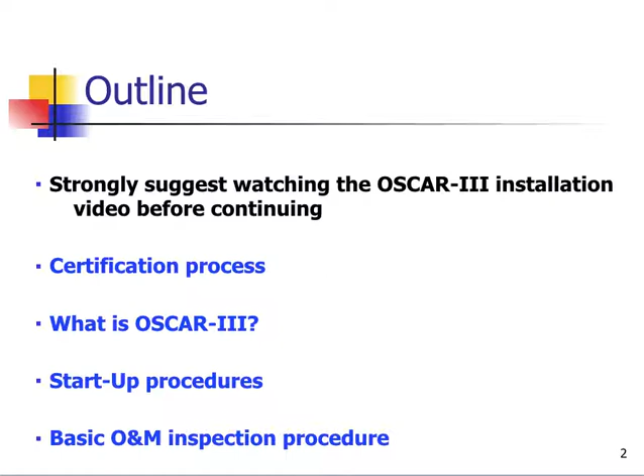The rest of our presentation will be the certification process to become certified as a maintenance provider. We'll also discuss what the Oscar III actually is, go through some of the startup procedures and quality control checks, and then we'll cover the basic operation and maintenance inspection procedures.

Our certification process has 4 basic steps. I'd like to go through those in a little more detail. The first one is once you've completed this video, we suggest that you give us a call. We'll have a brief phone conference, answer any questions you may have, emphasize maybe a few items, and then we'll place your name on our certified list of professionals.

That can be found on our website by clicking on the Certified Professionals link. And what that list entails, it'll just be a list of individuals alphabetically by last name. We also include the county that your business is located in.

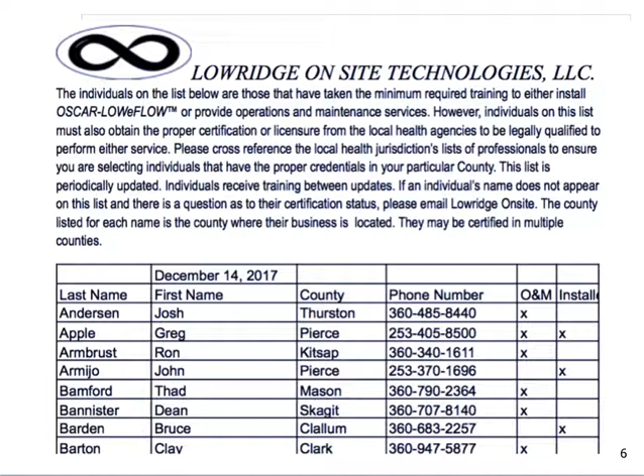This is not a limitation on where you can perform your services. It's just to give an idea of geographically where you're located. Whatever phone number that you'd like to have us post, and then check whether you're a maintenance provider or installer, and in some cases both.

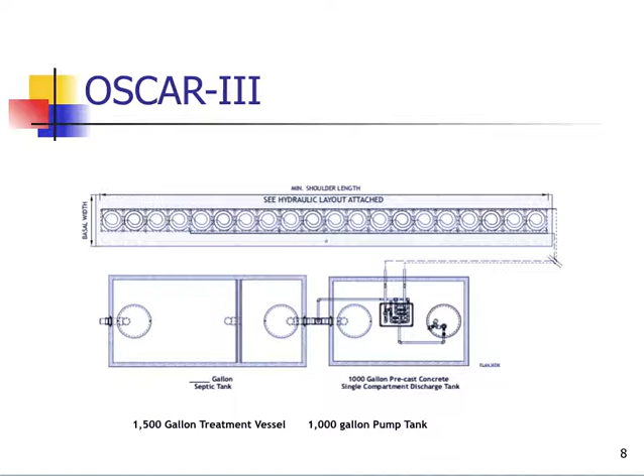So what is the Oscar system? Well, it's a simple wastewater treatment device. It's a 1,500 gallon septic tank with a 1,000 gallon pump chamber. We pump effluent through a headworks, a series of valves and filters. And then we have what we call the Oscar disposal component for the final treatment and disposal.

The Oscar is an acronym that describes what the system is. It's an on-site sand coil area recharge. As you can see here, it's just some simple coils in a simple format connected to some supply and flush manifolds over a bed of sand, and then of course we'll cover this unit with another 6 inches of sand as well.

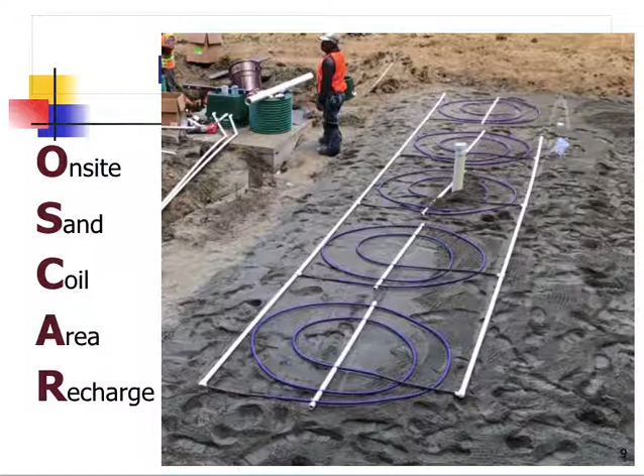The technology is proprietary. It is a treatment unit, again, and also a final disposal component. We do have, again, the coils and the sand as the basic 2 components of the Oscar drain field. We do have coils in 2 different arrangements, 25 gallons a day as well as 50 gallons a day with respect to the Oscar III.

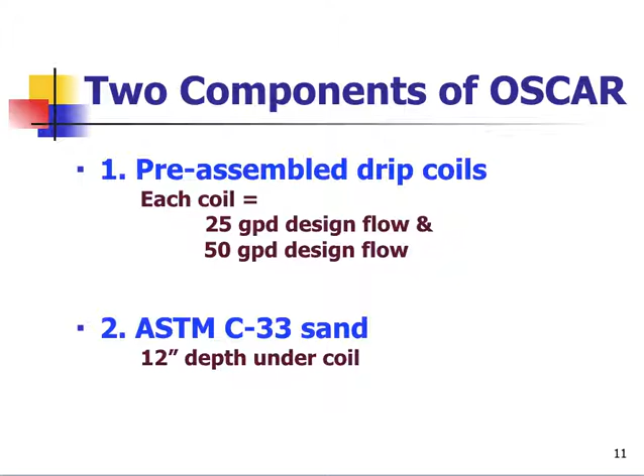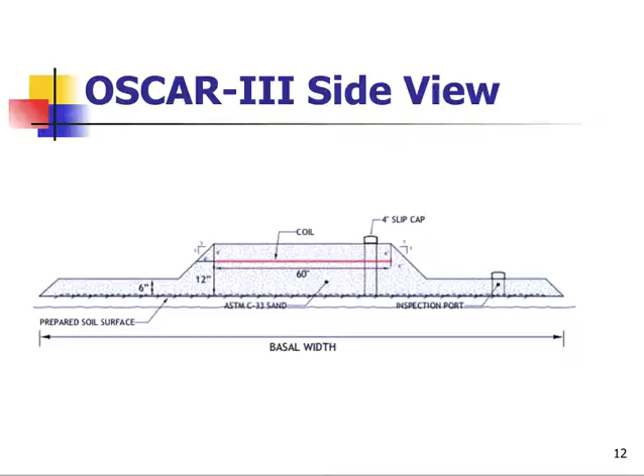Our discharge tank is a simple 1,000 gallon pump chamber. We have 2 floats, a timer enable float as well as a high level on float. We do want the bottom float to cover the pump, but as well as a minimum of a 4-inch separation between the bottom and the top float. You may see a greater separation between the 2 floats with the Oscar III, just depending upon what the local regulators may want to see as far as surge capacity.

Now that we're through with what an Oscar is, I want to go through some of the startup procedures and get into the nitty-gritty of the headworks and how things are arranged. The startup procedures help us determine the wiring for the floats, pumps, and valves to make sure they're done correctly, not so much by reading wiring diagrams, but more through functional tests. Once we're through with the startup procedures, we'll also know what the correct flows and pressures are.

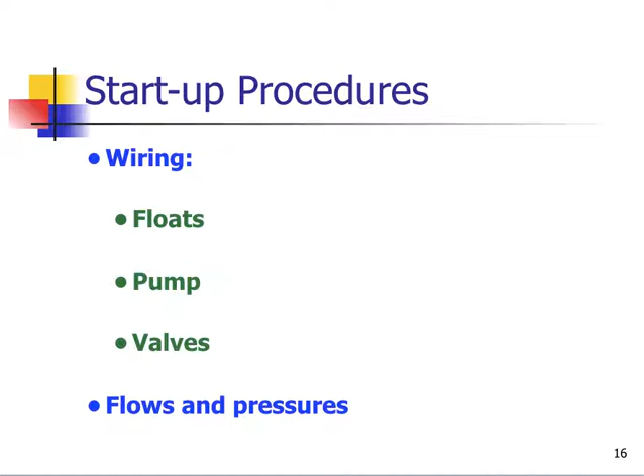The startup procedures, with respect to operation and maintenance, help us diagnose problems with the system. Many times I'll get a call with people having questions about what's happening. If they would have just gone through the startup procedures, they would have determined where and about what the problem is. It's a great place to start in determining where issues may be.

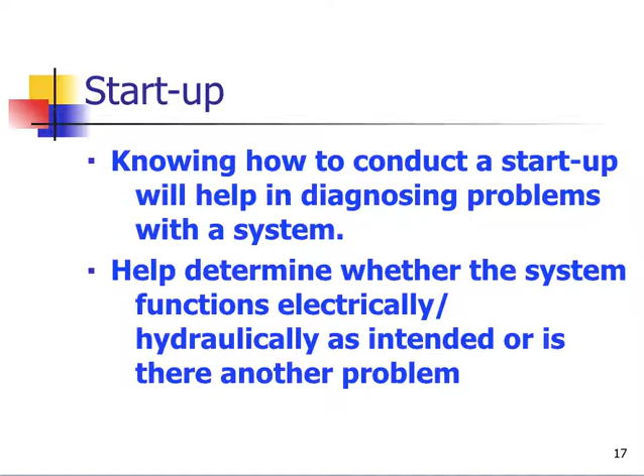Now the float wiring. We want to determine if the floats are wired correctly in the panel itself, that we've got the right wires in the right bus terminal positions. But we also want to make sure the float positions within the tanks are correct, either at the right height or in the right order.

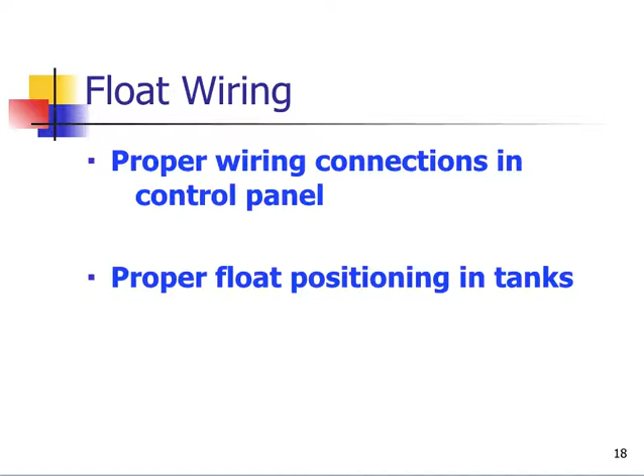In our control panel used for the Oscar II, the incoming wires for all the external wiring attach to the bus terminal, which is divided into 3 sections by these 2 yellow tabs. Everything to the left of the tabs is for the floats, between the 2 tabs is for valves, and everything to the right of the tabs is for pumps and incoming power.

So the way to check the floats, once all the wiring is done and we've turned the system on, we just want to lift up the top float and in about 5 seconds get a high level alarm. If you raise the bottom float, you'd have to wait maybe a few minutes for the pump to come on. An easier way to check the floats quickly is to use the input screen on the controller.

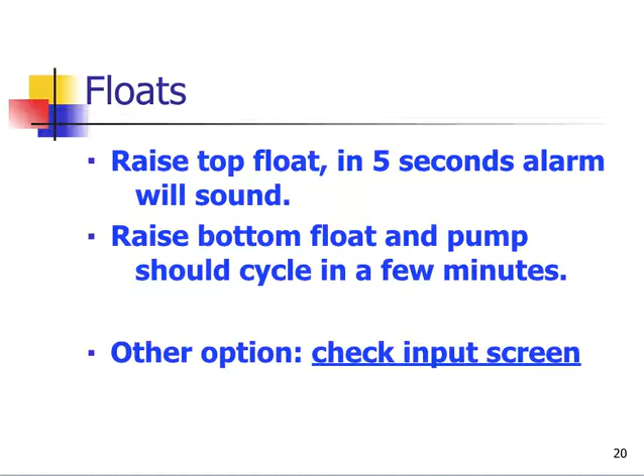The wiring diagram gives us a couple of pieces of information. Here we see bus terminal positions 1 through 4, where our bottom float is in positions 1 and 2, and the top float is in positions 3 and 4. You'll also notice at the very bottom, below the floats, input number 1 and input number 2, designating the input indicators on the screen, which we'll look at next.

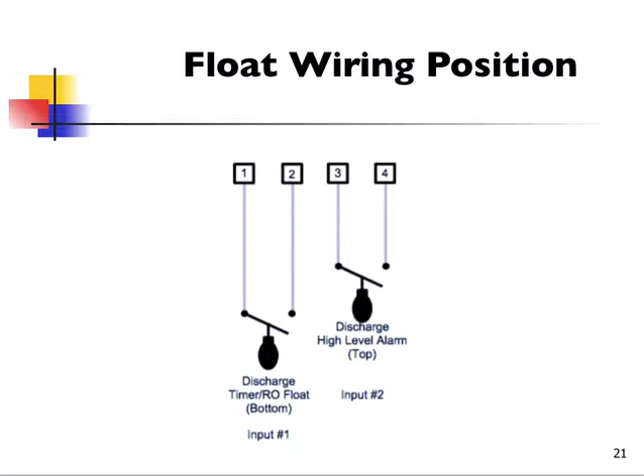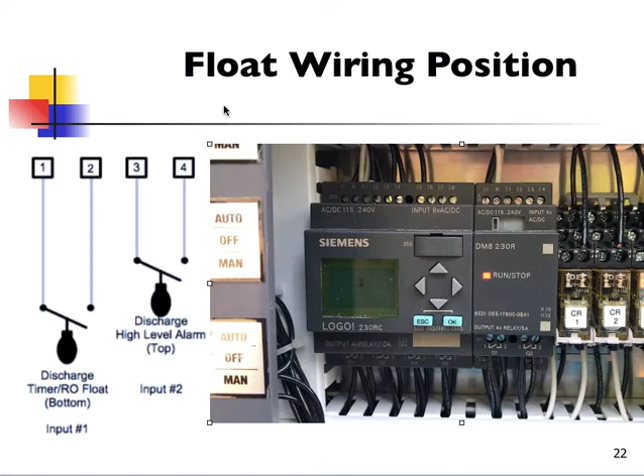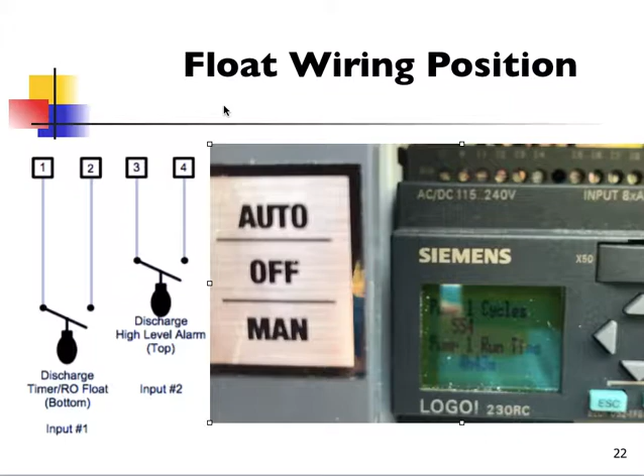So here we've got a controller, and when we turn the power on, the first thing we'll notice is the little indicator light illuminate. Once it goes green, we know we've got adequate power and the system is ready to function. As soon as the light goes green, we get our pump cycles and pump run times. Then we can use the down arrow and scroll down 2 or 3 or 4 screens to the date and time stamp. From here we can use the left arrow and go over to our input screen, and we know we're there when we see a large capital I in the upper left corner.

There we go. So what we can see with this is in this top line, which is really the only line we're looking at, the number 1 is backlit, indicating that our bottom float in the discharge tank is up, so we know we have at least enough water in there to start the on-off cycles. The number 2 indicator would be the high-level discharge float, which is number 2. Number 3 is usually a low pressure alarm if we were using an ATU with an Oscar system. This particular indicator would be that. So this gives you an idea of how valuable it is to take a look at the inputs.

Now if we wanted to test the top float, if we lifted the top float in this situation, the number 2 input would have a dark background, or be backlit.

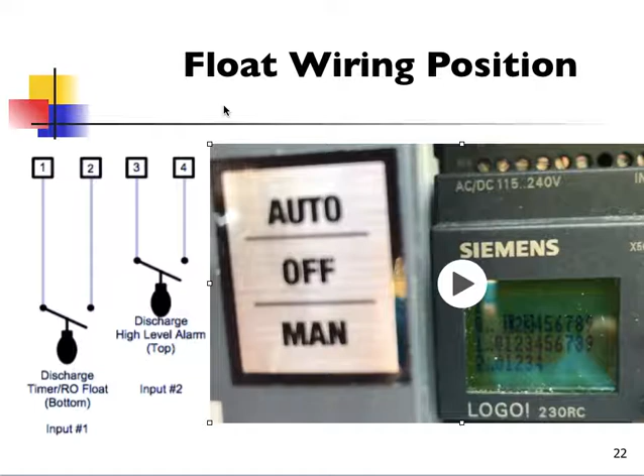Again, regarding the position of the floats in the tank, we need to have the pump flooded at all times, with a minimum of 4 inches between the 2 floats. In our float tree, we really do want it to come all the way down to the bottom of the tank, and then it's just held up by our float bracket in the riser itself.

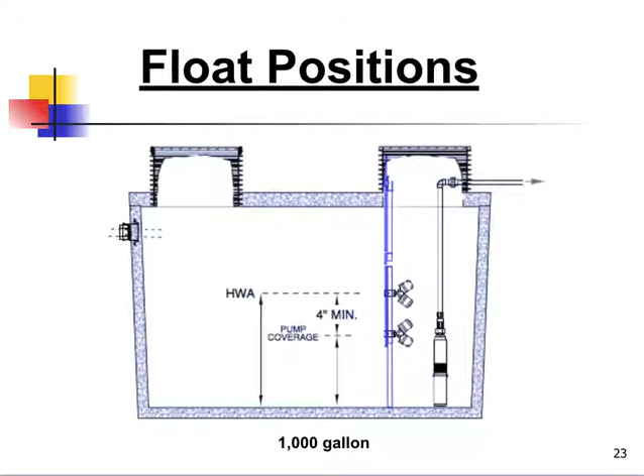The headworks, some of the specifications: we have a 3/4 inch disc filter, which is 120 mesh or 130 micron size in filtering capability. We also have 5 normally closed solenoid valves, and 3 pressure gauges.

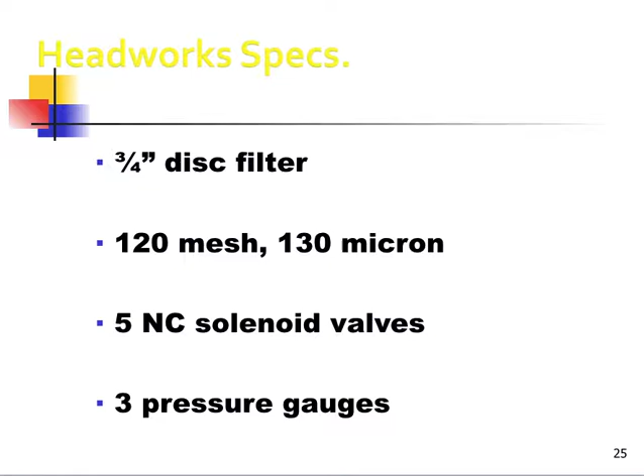Now the solenoid valves are actually made for the sewage application, not irrigation valves put in the wrong place. All these valves are normally closed, which means we need 2 things in order for water to flow through them: 24 volts to the solenoid, as well as somewhere between 8 to 15 psi at the valves to get them to open up. If we have hydraulic pressure at the valve but no electricity, the valve will not open.

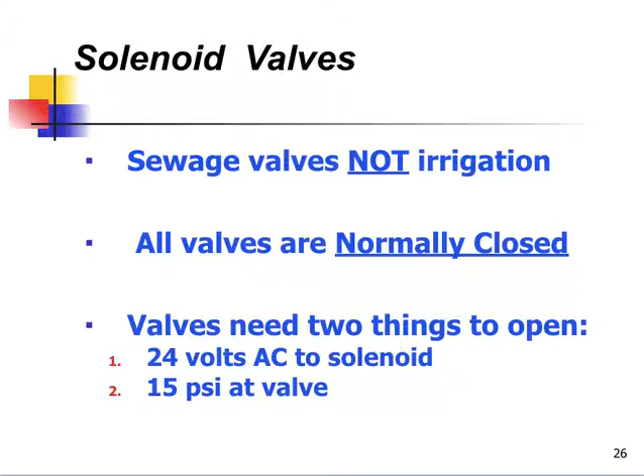Now the control panel will go through what I call 3 valve functions: V1, V2, V3. V1 is our dose, where we're just dosing the Oscar system. Our on-off times equate to about an 8-minute cycle between each dose. Valve 2 function is our disc filter backflush, very short, about 15 seconds. Our V3 function is where we're flushing the coils, and that lasts about 2 minutes. Once we're through with the coil flush, we go back to the on-off cycles, dosing the Oscar, and these 3 valve functions repeat themselves in perpetuity.

And of course, if there's no water in the tank and the low-level float goes down, then it just rests and waits for the next sequence to take place.

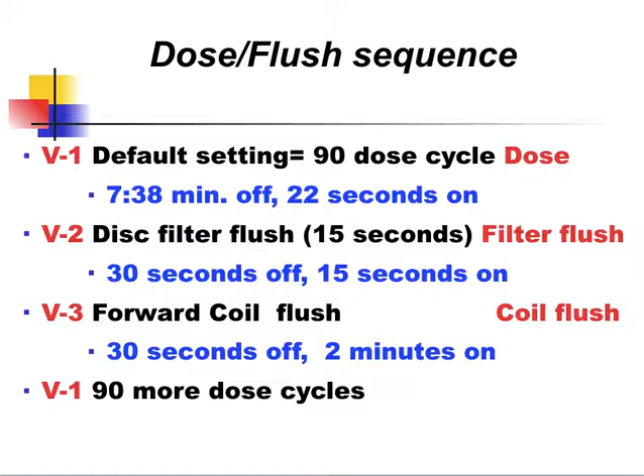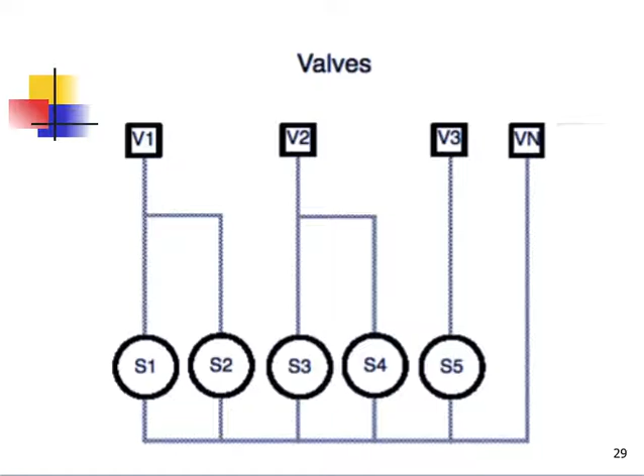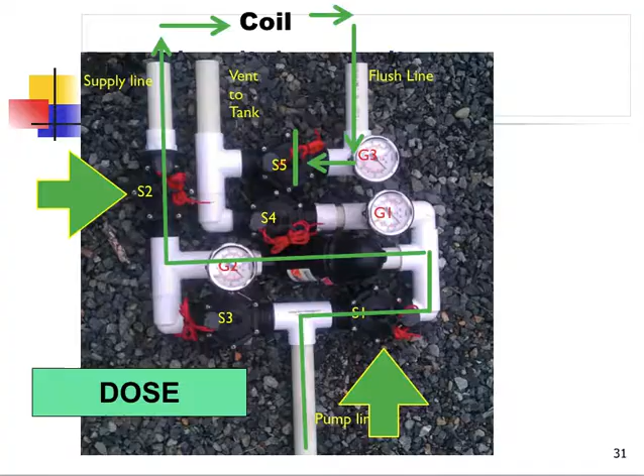Knowing that we need both electricity and flow to the valves, we need to turn the pump on and turn valves 1 and 2 on, and this will simulate what the controller would do. In our headworks, the flow path will follow this green line. Solenoids 1 and 2 will open up, allowing water to be filtered through the disc filter out into the coils. Valves 3, 4, and 5, because they have no electricity, will remain shut. So the flow path will look like this.

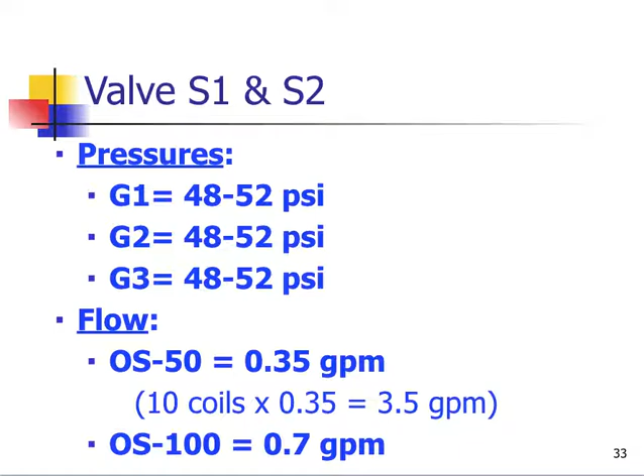Our pressures on gauges 1 and 2 are going to be right about 48 to 52. Gauge 3 about the same, maybe a little lower because we're losing some pressure and flow through the tubing and so forth. The flow, depending upon the number of coils, for instance if we had 10 of the OS50 coils, we'd have a flow rate of about 3.5 gallons a minute. The OS100 coils, which are twice the size, have a flow rate of 0.7 gallons a minute. So depending on the number of those coils, just multiply by 0.7 and you should have a reference point to check with your flow meters.

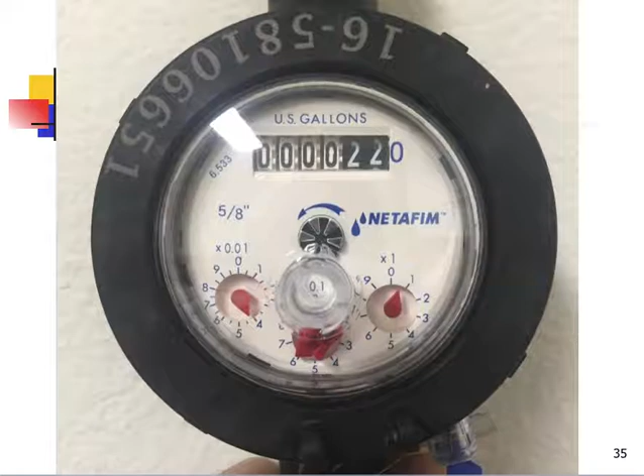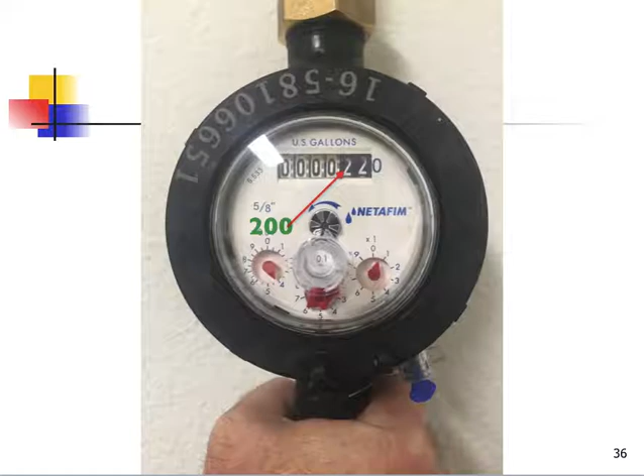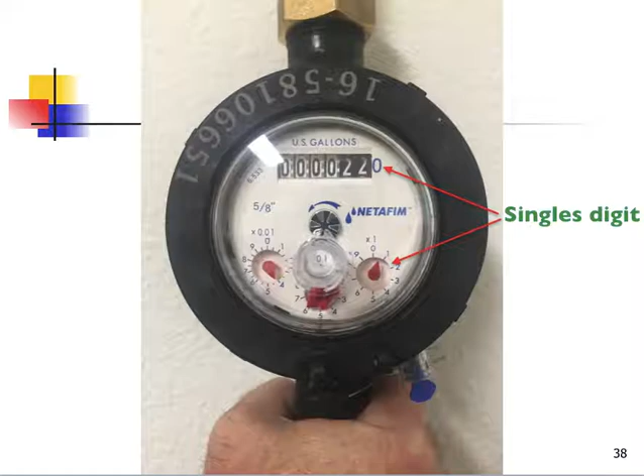Measuring the flow, we use a Netafim flow meter. Most people read this incorrectly. The first digit with the black background is the 100 spot. So if we're reading this dial, we'd say we have a reading of 220, and then to get the single digits we'd look at the first dial on the right. Being less than 1, it would have a 0 in the ones position. So reading it further, we'd have 220.6.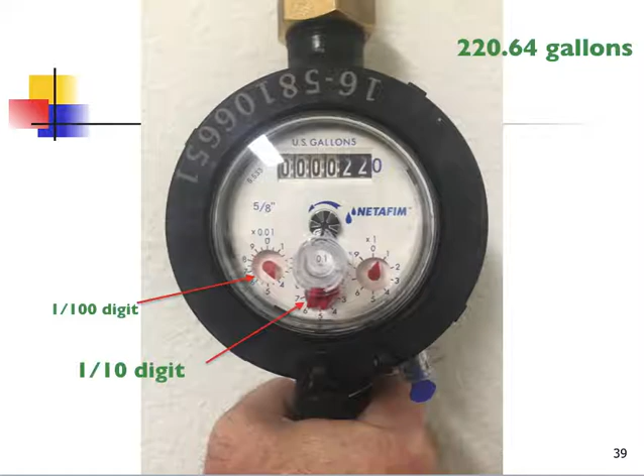The red dial in the middle is tenths of a gallon, you can see it's at 6, or 0.6 gallons. And the dial on the far left is 1/100ths of a gallon. So here we have 220.64 gallons on this dial for a reading.

The easiest way to measure flow is if we turn the pump on with the toggle switch and turn valves 1 and 2 on, let the system pressurize so we've got all the air out, and once we have a consistent flow during complete pressurization, all we need to do is count the rotations on the middle dial for 1 minute, and that'll give us our gallons per minute flow. That's the important number to record.

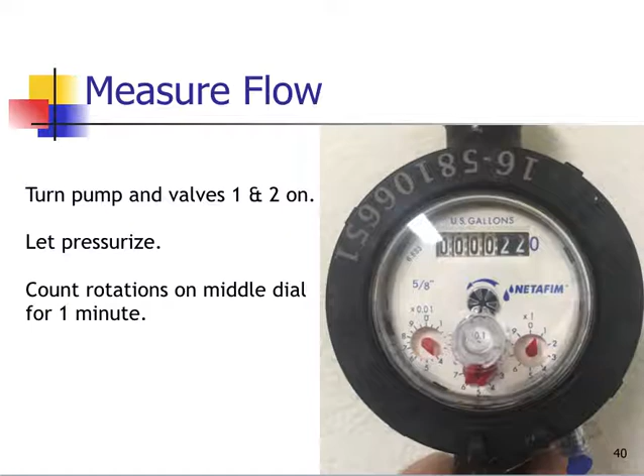Again, the flow rate: if we're using the OS50 coils, each coil is worth 0.35 gallons a minute. The OS100 is 0.7 gallons a minute.

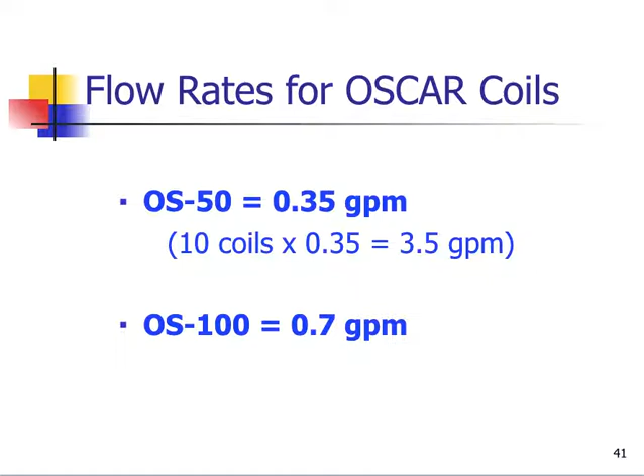The next thing we want to check or simulate is the back flushing of the disc filter. You'll notice that the flow path we're following here, the forward flow path, is the water comes into the housing of the disc filter, goes from the outside of the disc cartridge to the inside, and then exits the filter housing from the center of the discs themselves.

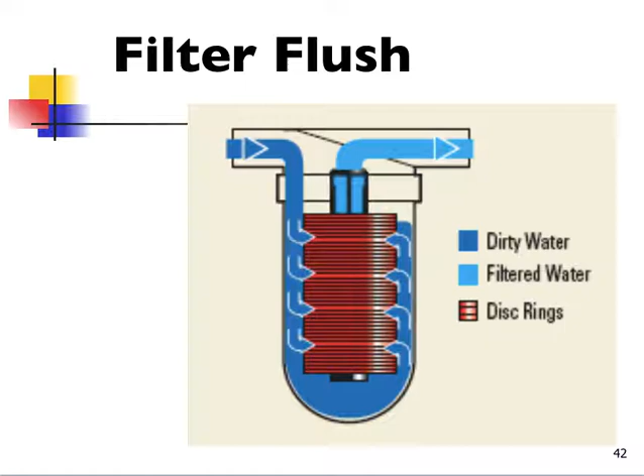What we're going to do is simulate the reverse flow. We're going to pressurize and have the water flow to the center of the discs, forcing it out, which will then clean the internal portions of the disc filter.

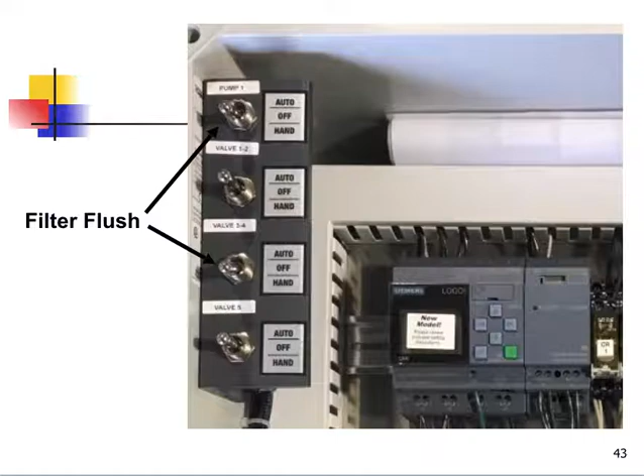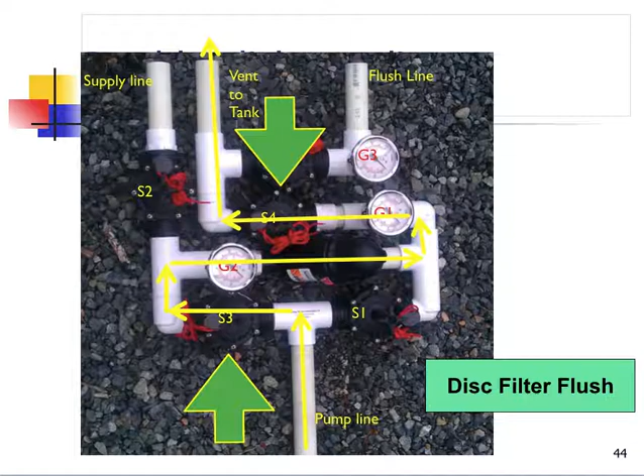So to do that, we'll need to energize valves 3 and 4, put them in hand or manual, and then pump 1 we'll have to put into the hand or manual position. So now valves 3 and 4 will open, the water path will flow backwards through the disc filter, and then we'll vent it back into the beginning of the septic tank. And the flow path will look just like this.

To indicate proper functioning, the pressures we should see here is gauge 2 should be about twice the pressure of gauge 1, usually around 20 and 10. Sometimes it'll be 18 and 12, or 18 and 8, something like that. We shouldn't see any pressure whatsoever on gauge 3. The flow we're really not concerned about.

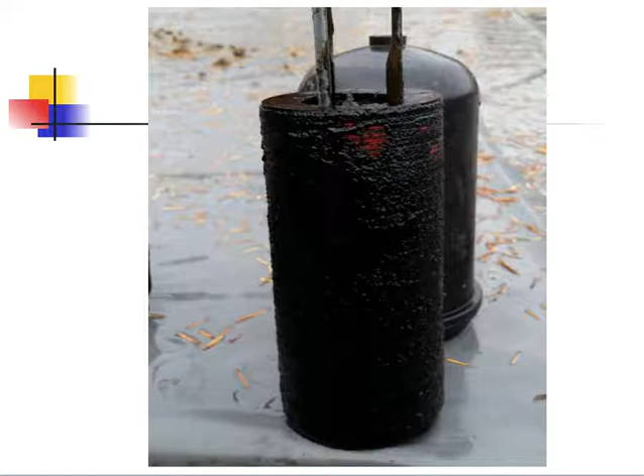Now what will happen in the disc filter, this is a filter that's been in operation for about 8 months. It looks like it's very dirty. We probably would think that it's clogged, but this filter was on a test that was run for 8 months. The flow and pressure readings were taken 3 to 5 times a week for the 8 months, and there were no changes in the pressures or flows.

You can see the red color of the discs. That's where a lot of the water is coming through to clean out the interior of the discs. But this is enough to keep the system functioning at adequate pressures and flows.

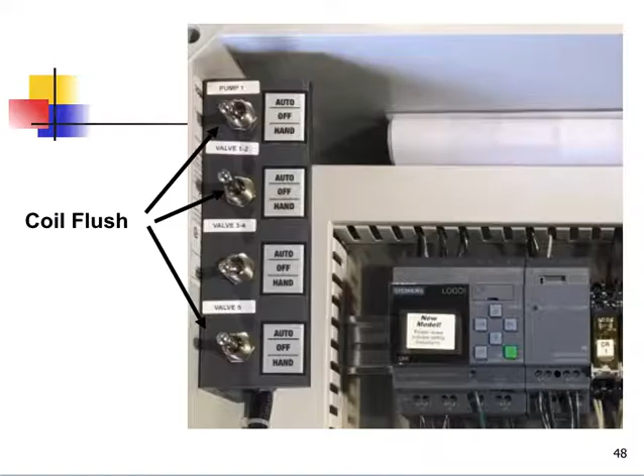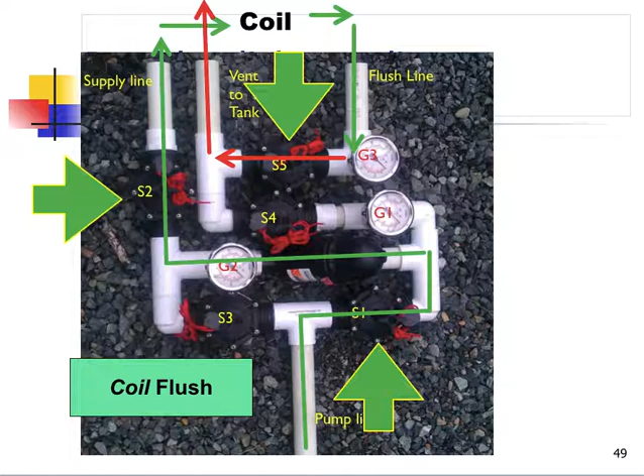Once the disc filter has been back flushed, we'll want to forward flush the coils. Again, we need to turn the pump on. This time we want valves 1 and 2 in conjunction with valve 5 energized. So 1, 2, and 5 will turn on. We'll have a forward flow through the coil, through the filter, forward flow through the coils as well, and then the flush water will then enter from the vent line into the tank. And so our flow path will look like so.

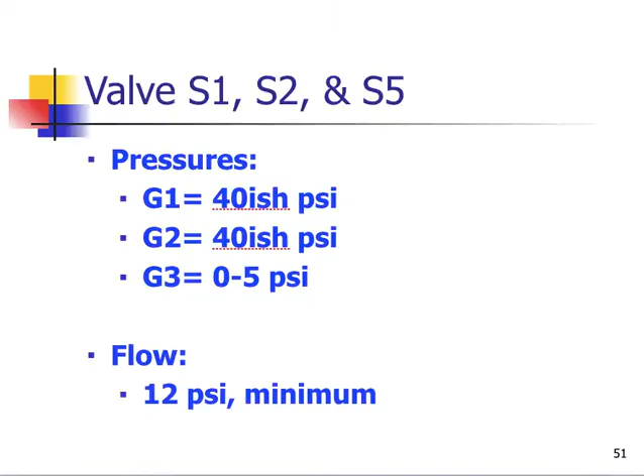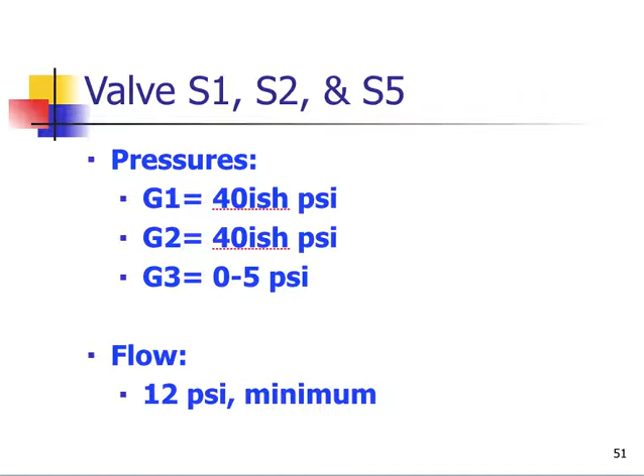The pressures we should see indicating that everything has been wired correctly: gauges 1 and 2 should be about 40 psi. Gauge 3 might register a couple psi, but usually none. And if we were to measure the flow, we want to see at least 12 gallons per minute. Now, you've got psi, but it's 12 gallons per minute flow at that during the flush cycle.

So the question becomes what to record for the as-built or for future O&M. The best thing is to record the pressures during dose, 1, 2, and 3, and then also the flow during the dose.

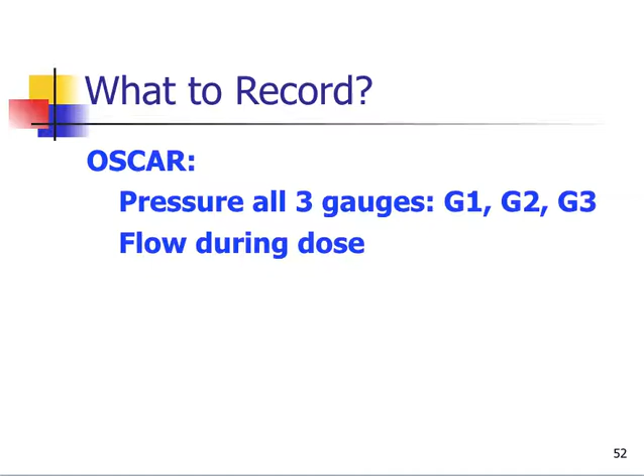The startup's now complete, so we know that all floats, pumps, and solenoid valves are wired correctly. Pressures and flows are recorded. They all seem to be normal. Now when we leave the system, we want to make sure that all the toggle switches are in the auto position and all breakers are on. The easiest thing to remember is everything is in the up position. All the breakers are up, all the toggle switches are up. If we do that, the system is ready to operate in its normal function.

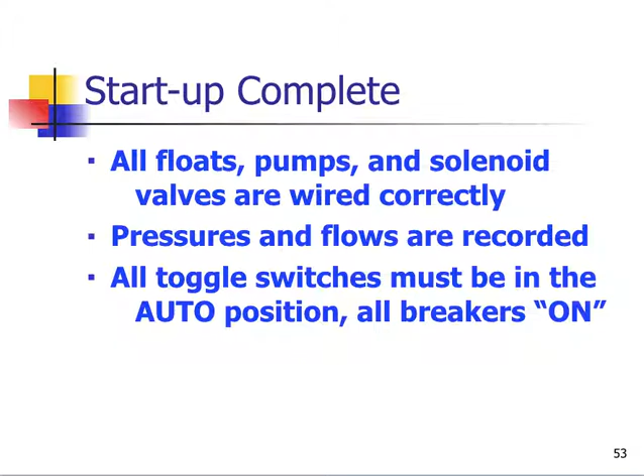Now some of the things that we're going to look for, in addition to maybe going through the startup procedures, is this list here. Green striping, that's just shorthand I use to say what do the Oscars look like. And if you'll notice, we're kind of working from the back of the system, or from the end of the system, going backwards toward the house in a sense. So I try to look at the drain field first, or in this case the Oscar, then look at the pressures and flows, look at the tanks for solids accumulation, and then do my recording of all the data.

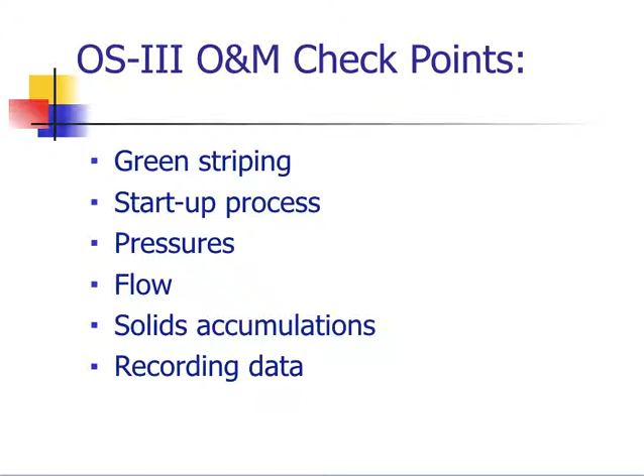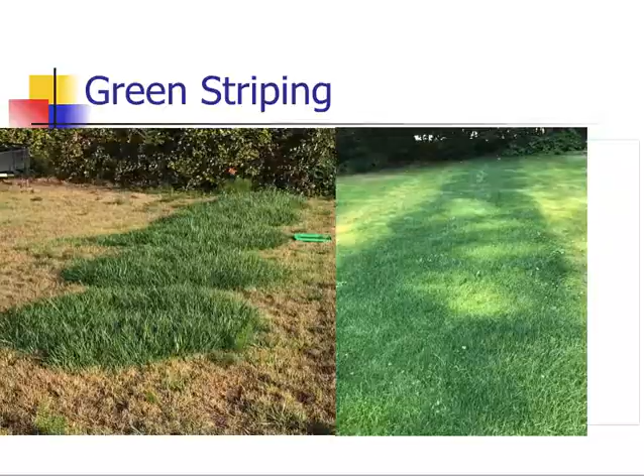Now here we have an Oscar on the other side of the fence. It's kind of unkept, with very tall weeds and clumpy growth, but to me this is an indication that the system is working quite well, just like the other one where the lawn's a little more taken care of. The lush green grass indicates good distribution of effluent evenly throughout the Oscar. The sides are in good shape, and we don't see any liquid on the ground, so we're looking good in this application as well.

Now the problem with this particular system, just as an FYI from a maintenance standpoint, you'll notice the real brown area here. This is all overburden from the tanks, and they've placed it downslope from the Oscar. It's hard to tell from this picture, but we've created a subsurface dam by compacting all the soil, so the treated liquid from the Oscar doesn't have a place to go. It can get from underneath the Oscar, but once it moves a few feet, it hits an obstruction and has to move laterally to the left, toward us. So this is an indication that it's not so much that the Oscar has a problem, but the site itself has been manipulated and isn't doing too well.

At this point, as far as an operation and maintenance tech check, you may want to do a startup process. On the other hand, if you can see that the system has the right pressures and flows, and the Oscar is working correctly, we shouldn't have any real need to do the startup process, but they're available for you.

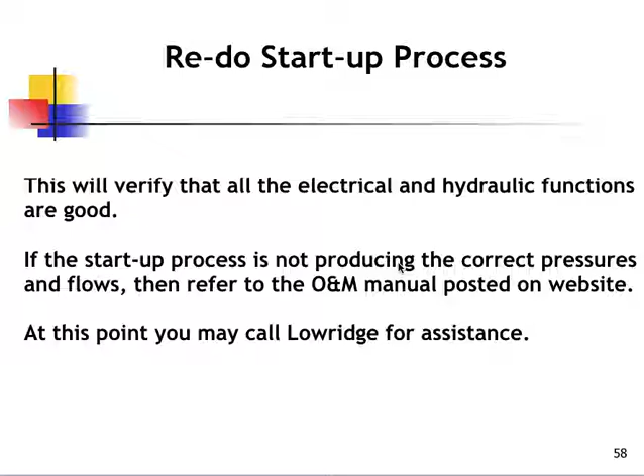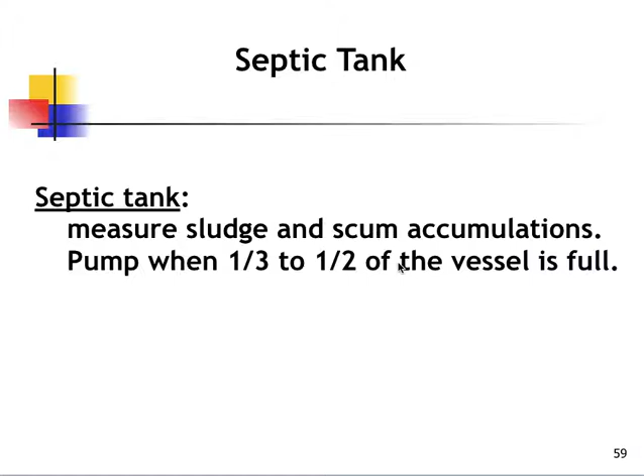Now the septic tank, we're just going to measure for sludge and scum accumulations. When about a third to a half of the vessel is full of solids, we probably need to have those wasted off at least. Some jurisdictions require all the contents of the tank to be pumped out. Whatever that is, let's make sure it's done according to local rule.

Now the discharge tank, we want to measure the solids accumulation in the tank. If we start approaching the inlet to the pump, we probably want to at least waste off the material that accumulates on the bottom. If you see a little bit of film growing on top of the liquid level in the tank, that's okay, it's not a big problem. If we start to form a mat like we do in the septic tank, we may want to take some action and get that cleaned out. But a little bit of film growing on top would be normal.

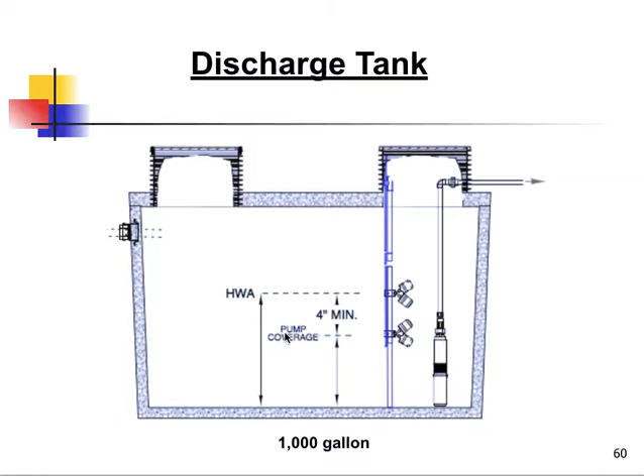So the minimum data you'd want to record is the condition of the Oscar, whatever you observe. Just state your observations. If you've got effluent on top of the ground, as an example, obviously we want to record that. If there was any damage done from trees falling, record those types of things as well. Again, we will record the pressures during the dose cycle, the flow rate during the dose cycle, and any accumulations in any of the tanks.